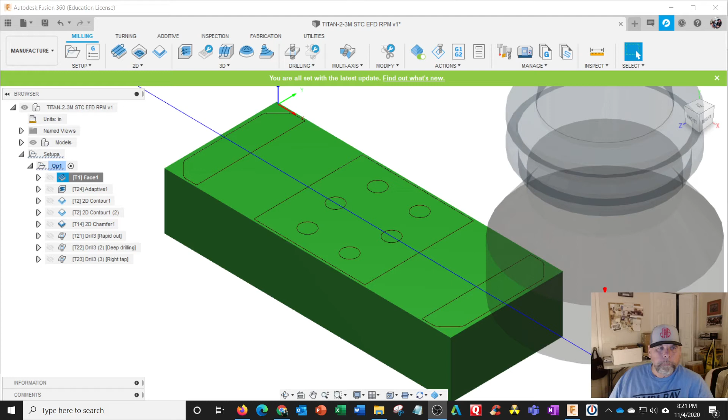We're going to improve our Titan 2-3M project by running better feeds and speeds. If you watch some of the videos I made on feeds and speeds, talking about chip load per tooth and how many RPM you're going to run.

So if you start watching many videos, Titan Lab videos with demonstrations, he puts right up there RPM, surface feet per minute, chip load. So all these are calculations. Initially he trains you with putting 4,000 on everything. But we can be more accurate than that and a little more machine specific.

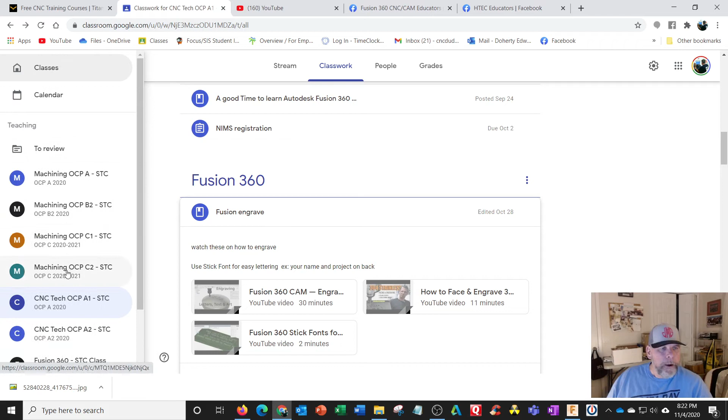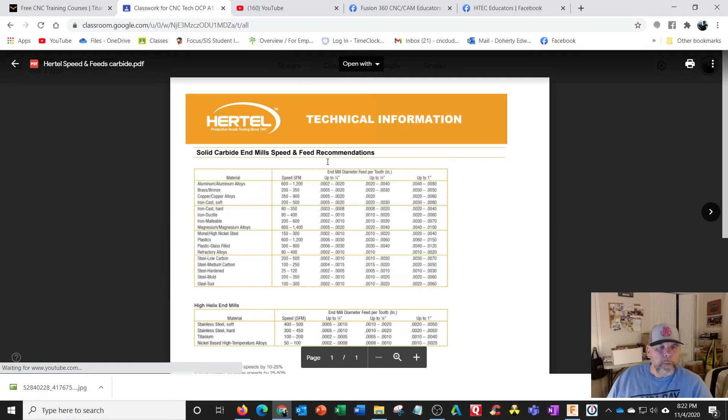Just for a quick review here. In classwork, we got the feed and speed lesson right here. And this would be a typical feed and speed chart. A lot of companies have these, so I probably should highlight this area right here.

We're pretty much cutting aluminum, and later on we're going to do some low carbon steel. So right here is surface feet per minute. Now if you watch the Haas Tips video on the tractor with the big tires and little tires, that's what we're all talking about here. This is not RPM, this is how you get RPM. The high and the low limit recommended, and it's a good starting point.

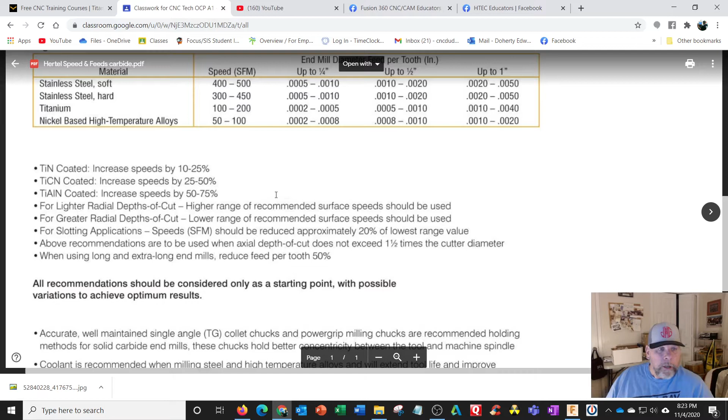There are other notes down here, like when using long or extra long end mills, reduce feed per tooth by 50%. If you're using coated ones, you can actually increase the speed, which is RPM. So there's some notes there. But generally speaking, for your normal milling operations, this is a good starting point. So you need to have RPM before you can start figuring out the feed rates.

In order to calculate surface feet per minute, it's a formula, but in Fusion it's built in. So let's try the half-inch end mill. That's this half-inch end mill. So right here it says feet per minute. Looking at the chart, 600 to 1200. I want to go as fast as I can, but not too fast.

Here's my Fusion again. Okay, 1200. That comes out to 9,167, and our fastest machine only goes 8,100, so it can't get there. Let me try 1,000. That's 7,639. It's capable of doing that.

It's actually a formula: surface feet per minute times the constant 3.82, divided by the diameter. So the small end mills will have to run faster than the big end mills to cover the same amount of ground if you were to lay it out flat. So actually you've got to turn the small tools faster, and face mills you've got to turn slower. So this is 706. We can attain that speed, and this is totally safe.

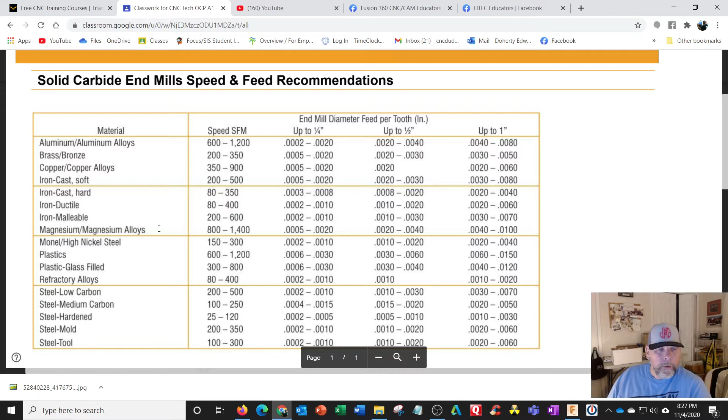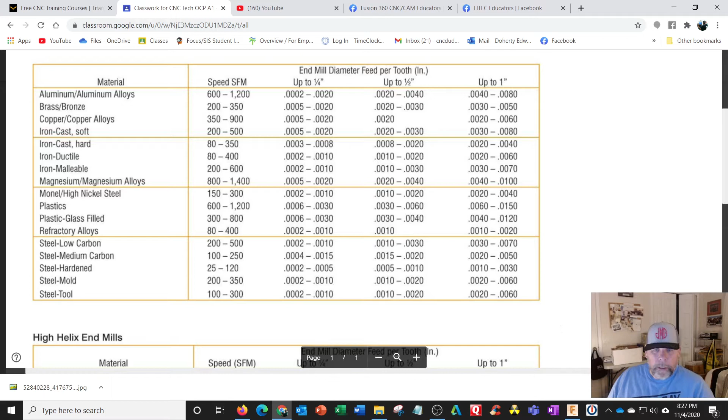We need to use some data. Now, if we're using low carbon steel, the surface feet per minute goes down, but the feed rate per tooth is really kind of the same, sort of. They're always in small numbers, thousandths. And if you have more teeth, that means you can cut more per revolution. So we can get into that. It's got math. But I made an updated tool list, and I'm going to update that right now.

I'm going to go edit these tools. All right, so it says select. I have the STC Titan building blocks right here. I'm going to go into here, and this is my current operation, but this is my STC Titan building block. And if I use the milling one, I can narrow it down to a smaller list. And these are sorted by size. So right there's 3-inch. And we have a 5.

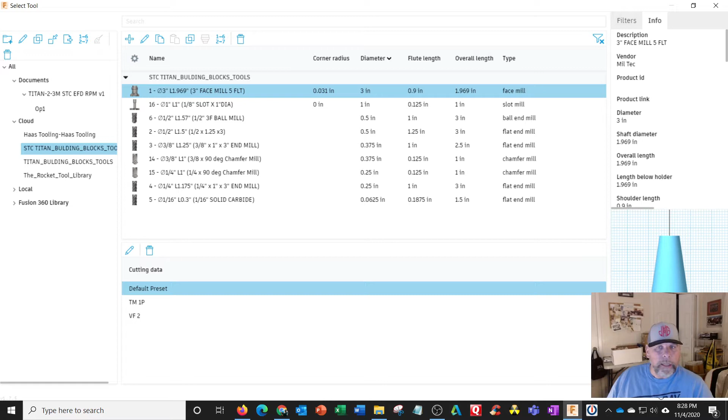What if we pick this one? It says right here, this is our two machines, TM1P. Press that, and these are all ready to go. 3,183. 35 inches a minute, that would work. If you're in the VF2, 3819, this would be fine. So I'm going to just plug these in for the VF2. All right.

Let's actually also, before I get too deep into it, look at machining time. Machining time here says 6 minutes and 36 seconds. I think I actually already improved this one once, but if I look at another one here, like this one, I put RPM on this one. And there's this one here, and I do machining time. Yeah, this is 8 minutes and 54 seconds. So that would be like 2 minutes faster.

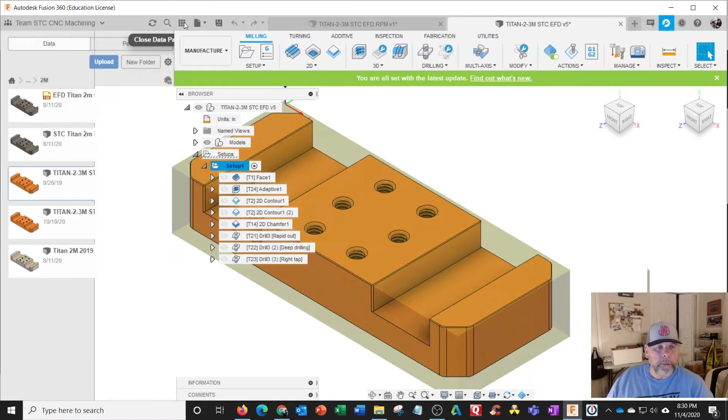Okay, let's go to adaptive, edit. I'm going to go into the new tool library. I'm going to go find my tool, milling, and that's the 1/2 inch one right here. Select. Default preset is already on 4,000. Or I'm going VF2, 7,500 RPM, 56 inches a minute. This should work just fine. Every time you change something, it says toolpath out of date, so we'll have to regenerate those.

Let's look at some other settings for improvement. Model top passes. Optimal load is 75 thousandths. That's the sideways cut. I would leave that alone. You might have to touch that one. And this one here, lift height, 0.01. And I'm going to change the non-engagement feed rate to 400 inches a minute. And then if I want these to always be there for adaptive, I can just go in here and say make default. So every time I bring this up, it'll already be there.

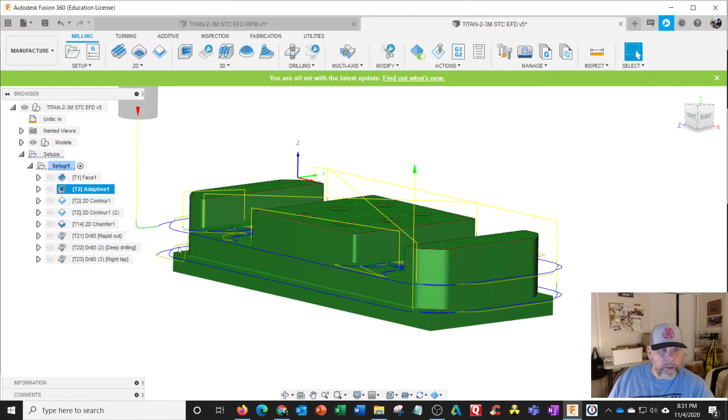And I'm going to leave this stay down level at 70%. Helix angle, this all looks good. Close this up and hit OK. It's recalculating. Okay, I noticed this one is cutting on 2 levels. So I had done some screenshots of settings, and I noticed that one of them was this number here, maximum roughing step down. We want to make this bigger than the tallest part of this thing, so we're just going to put in like 0.8.

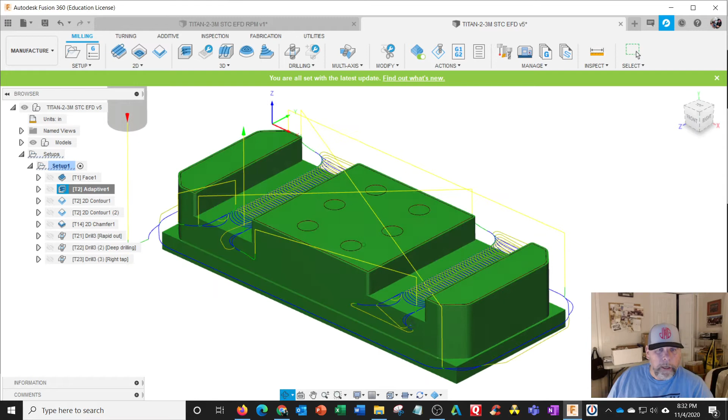All right, I'm going to hit OK. It recalculates. Now we only have one outside cut. It doesn't need to go around twice. This should work just fine. Let's go to 2D contour, which is the same tool, but we haven't set the preset. So we're going to save this. Oh, this one's not set. We got to go get the tool, that's why. Get the tool, but I'm using the same tool.

So I'm going to go into operation 1 right here. Why do I have 2 here? Yeah. I'm sorry, I got 2 tools on. That's why I'm getting messed up here. Cancel. Let me simplify this. I want to get rid of that. Ooh.

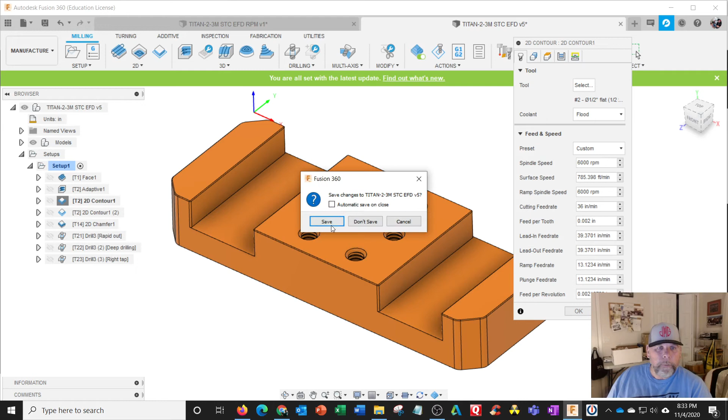Okay, go back to this one. Aha, I changed the wrong one. Do not leave it open. All right, we got the custom. Oh, there you go. So reselect this tool. Reselect this tool. Op 1. So I got to go in here and get the new tool.

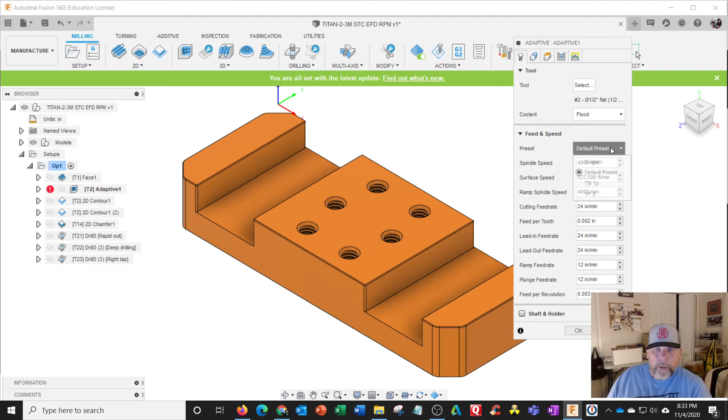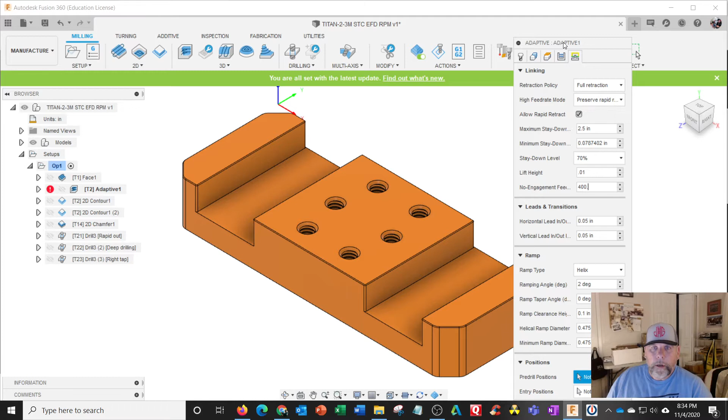1/2 inch end mill. Select and change this to VF2. And then go down and change this to roughing, max step 0.8 or 1 inch would work. And I'm going to change this to 70%. Lift height of 0.01, and I'm going to change this to 400 inches a minute. No-engagement feed rate. Hit OK.

Okay, recalculates, and this will do a full depth cut. All right, all the way around. Okay, let's go to the next tool. Edit. So we got to go select that tool, which is really in Op 1 already. So Op 1. Notice we have two tool 2s. We have duplication now. Which one is which? One of them has presets, one of them does not.

Let's select the bottom one. That one's got it. All right, VF2. Done, and this is contour milling, so we don't have to change any of these other numbers. Wear compensation. Okay, that one's done. And go up to here. Edit.

I got no custom settings. That means I got to go get the other tool in operation 1. Or I can just go right into the Titan, STC Titan. I think that will get me what I want. Notice down here it says cutting data, TM1 VF2. So if I was up here and pick this one, see this one only has nothing and this one's got both. Either one will work. I'm going to change this one to VF2. That one's done. That's contouring. That one's done.

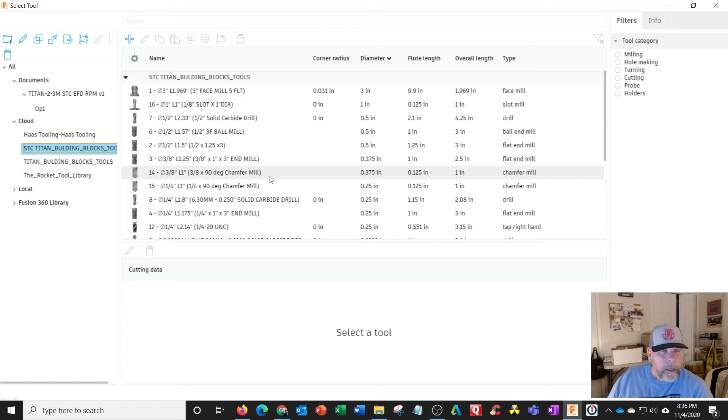We have chamfer mill. Edit. Select. Go into the STC library. That was the 3/8 chamfer mill. This one here. This has the presets. Okay, select. And I'll make this VF2. That's 8,000 RPM. That will work. Hit OK.

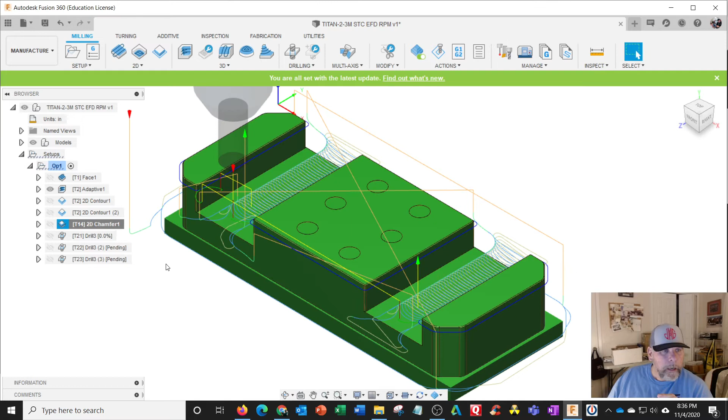And then we get drill, deep drilling tip. So this one uses the same chamfer tool. So I'm going to have to go get that. Select Op 1, and right here, 14. Select. I'm going to leave this at default setting at the lower RPM for the drilling, because this is doing two different things. So I don't think we can improve that at the moment. So we'll leave all those numbers the same. Okay.

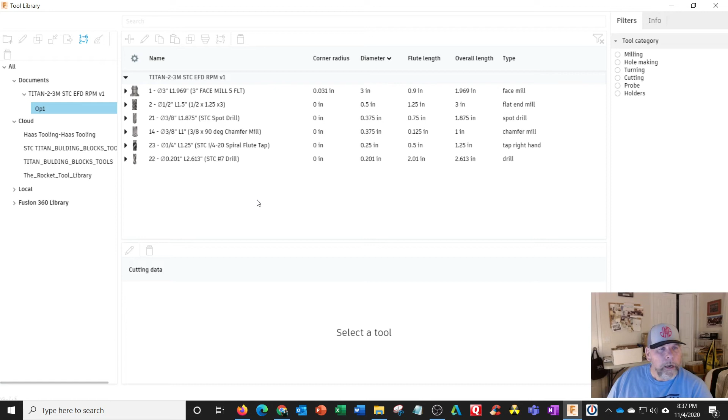All right, this one is the drill, and so these we can leave alone. Hit cancel. So now we have to renumber the tools because they're not in order. So I go to here, tool library, operation 1. 1, 2, 3, 4, 5, 6. I get 6 tools. Is that correct? Spot drill, chamfer mill. We have 2 of them.

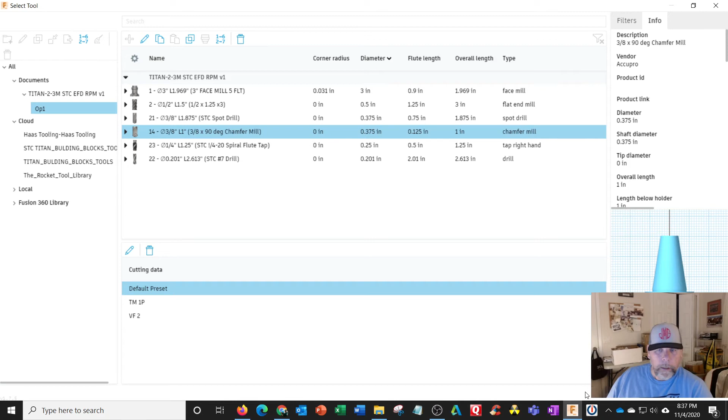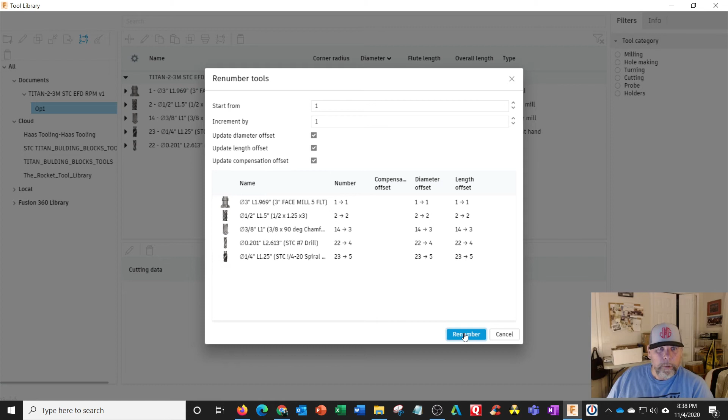Ah, I got the wrong selection here. I should only have, let's see, select tool, Op 1, 14, this one right here. Select. And leave it on default. Hit OK. Alright, I go to Tool Manager, Operation 1. I got 5 tools. I'm going to renumber them. It's going to be by order of operation. Renumber. The following are using feeds and speeds, but yes, they've been edited, correct.

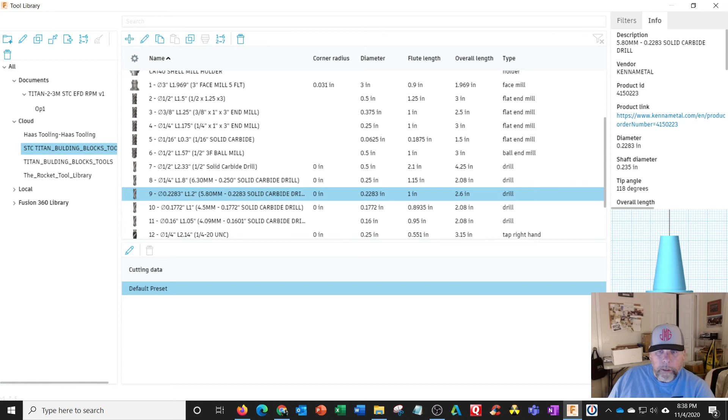Okay, I think one other thing we can check. Oh, wait a minute, this has got different tap, different feed. I don't know what I was doing there. STC, I gotta go get the proper drill, which would be 228 drill, close. That would be tool 4.

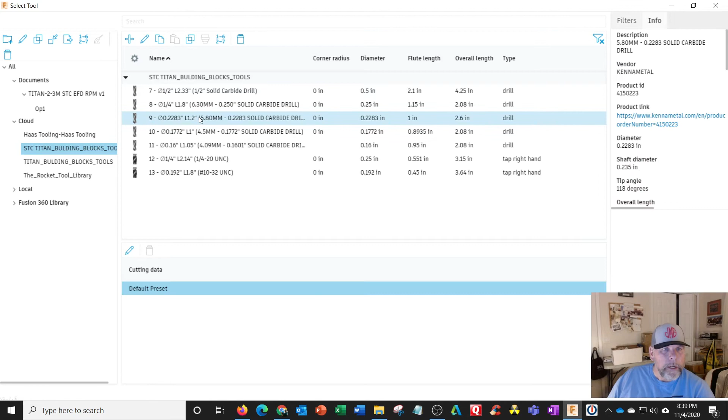Edit, select, Op 1. So I gotta go in here. And if I do hole making, it'll narrow my selection down to 228. Hit select. And we'll leave this alone. So another improvement in this one could be, right here it says pecking depth.

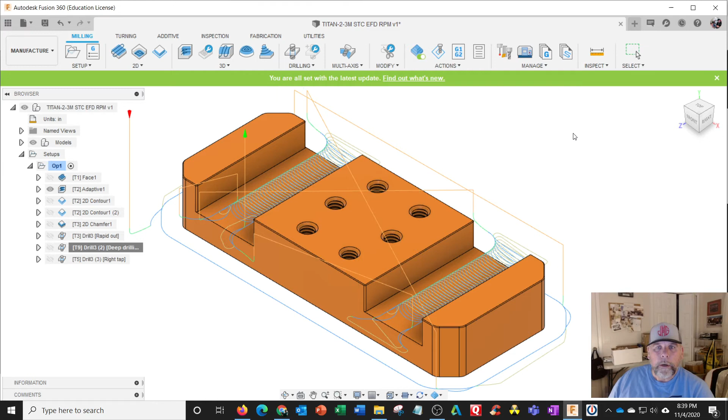So Mark Terryberry said we can do 1 to 2 times the diameter. So the diameter is 228. I'm going to make that 0.2. All right. And then the tap, let's go get the proper tap. Edit, select. I'm just going to go back in the library to make sure I have everything selected correctly. That's this one here, the 1/4 right hand tap. Select. Hit OK.

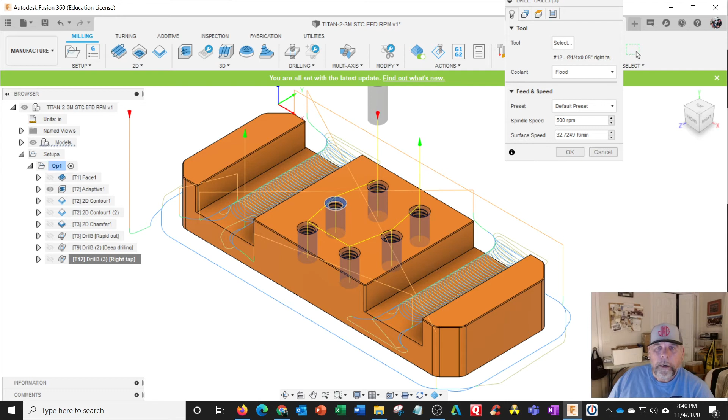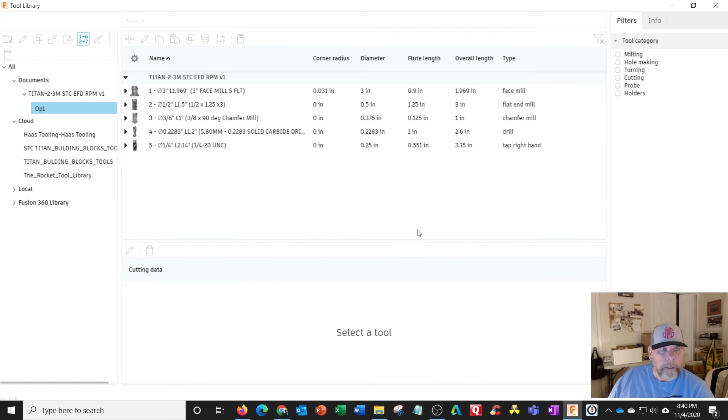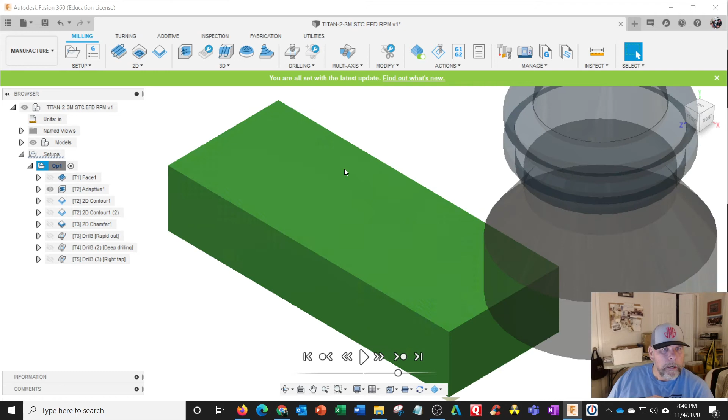Then go in the library. Now I have 1, 2, yeah, now I get them all selected correctly. I'm going to renumber these. Yes, hit yes there. Yes there. Okay. 1, 2, 3, 4, 5. That's correct now. Close. Let's do a quick time study. So this is now 5 minutes and 13 seconds versus 8 minutes. Close. Quick simulate. All right. Play. Now it's not going to run any faster in the simulation, but we'll make sure we selected everything correctly.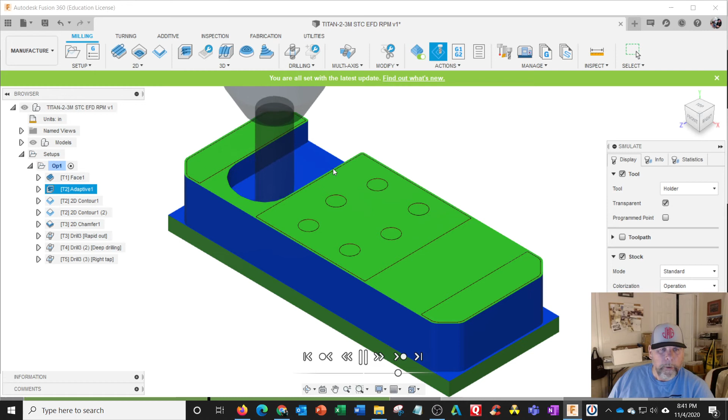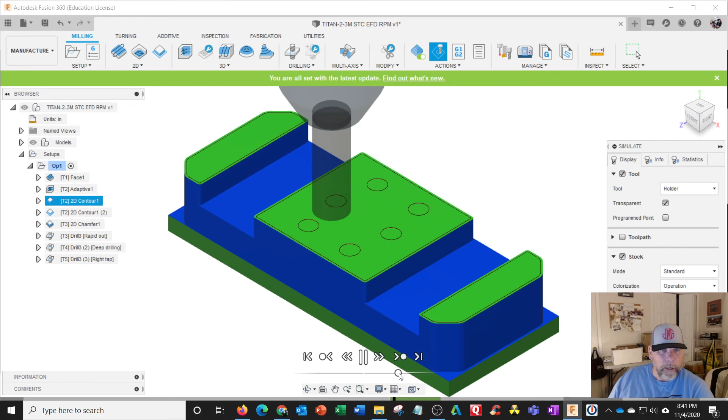So this is that trochoidal toolpath. This is the optimal load, how much it steps over. And you can see over here it's staying away from the boundaries. That's your stock to leave setting. And I have the operations set so it changes colors per operation. You might be using the same tool, but you can identify which one's doing what. All right, now I think it changes operations in a minute here. Yeah, it becomes another color. Okay, this is your finish cut. Okay.

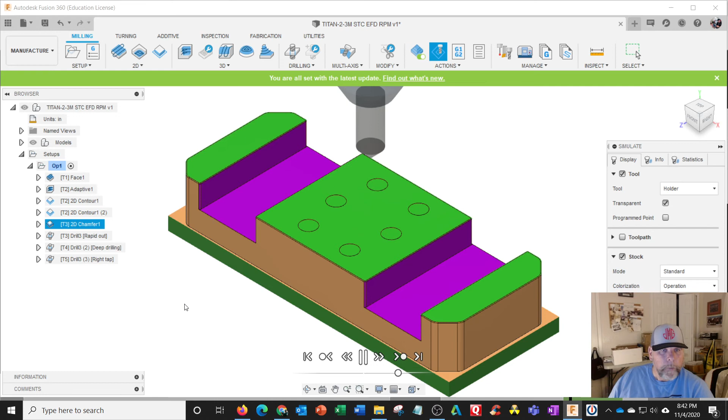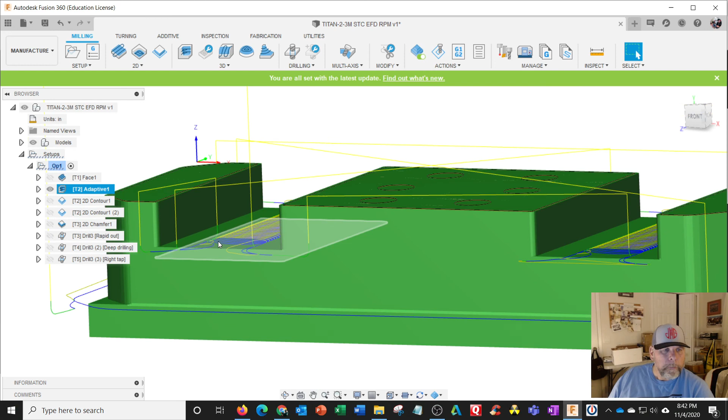Now we're going to, oop, that looks a little deep. Why is it so deep there? It would work. I think I must have a setting off. I think this should be closer. Chamfering looks fine. Done. Okay. Let me go revisit this one. I was looking at this. This looks like it's on the right level. Oh, you know what? Contours. Not that one, but this one. Notice this looks low. I think I picked the wrong number there. It's below that surface. I made a mistake.

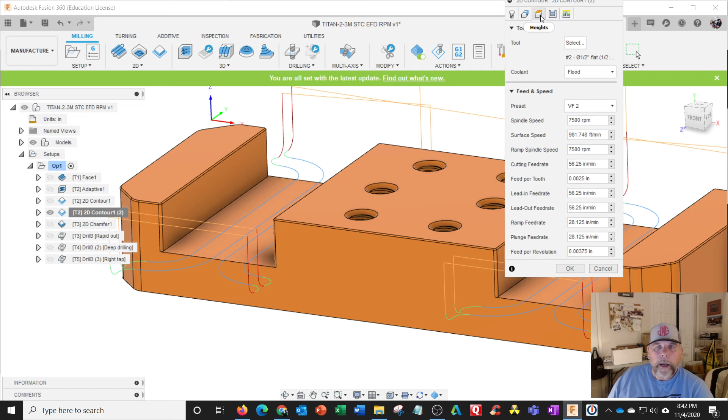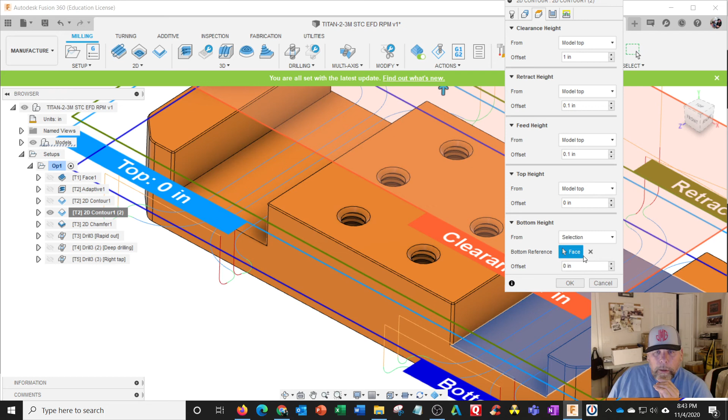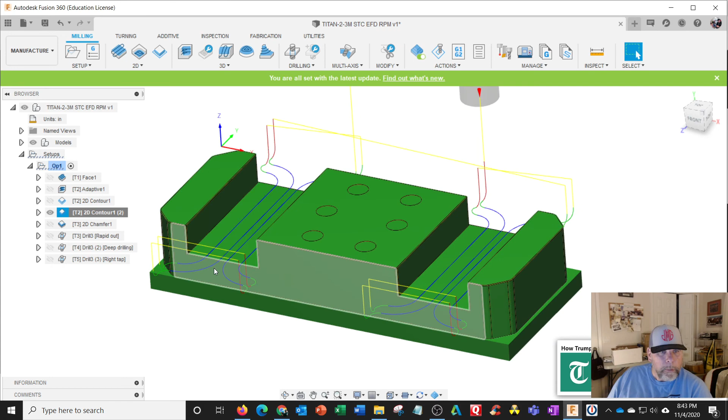Edit. Heights. Usually it has to do with the heights. This says selection. What did I select? I selected that surface. It says face. Let's see. This is nothing. This is that one, right? So this should say minus .400. Yeah, that looks right. Okay. Now that looks correct. See how these lines are up above? Oh, okay. Let's just do a quick simulate. I'm going to jump ahead by operation. Operation 1, operation 2. Oh, I'm sorry, 3, and now we'll hit play. No, it's still got those lines there.

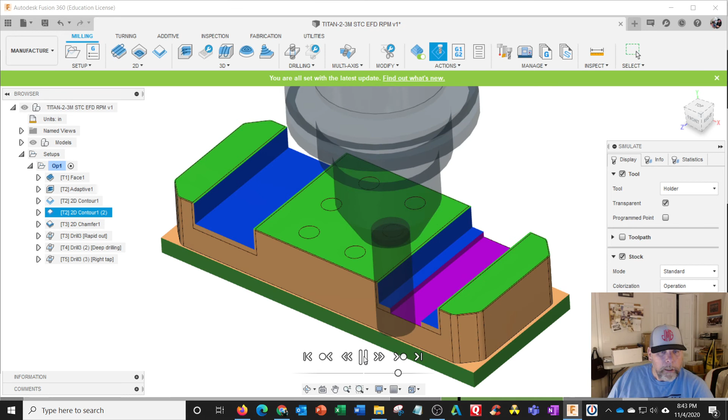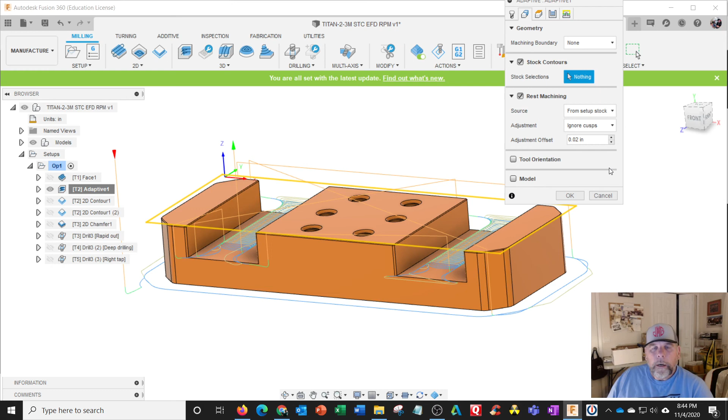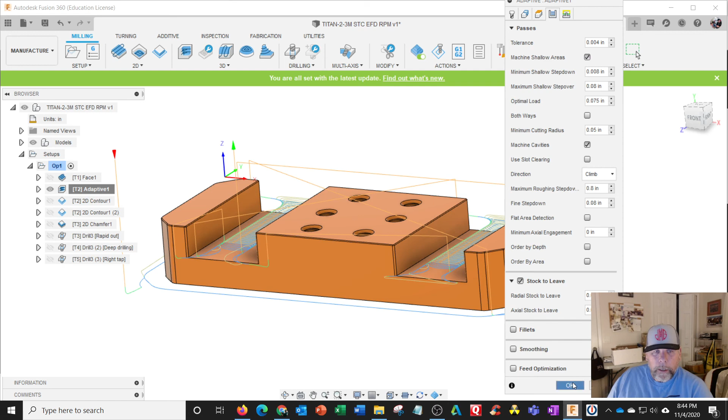All right, let's look at the adaptive settings. Now it looks high. Okay. What do we have here? Geometry. Rest machine. You have 15 minutes left of computer time. Heights. Well, yeah, that's okay. Stock to leave 20 and 20. Fine step down 80. Use slot clearing, machine cavities. Machine shallow areas. Maybe that's it. Hit OK. I think maybe that looks better.

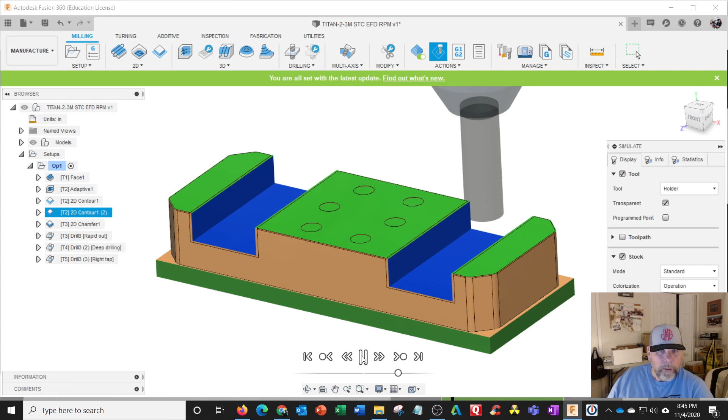So this is where I'm going to take some screenshots. Simulate. Jump ahead. Jump ahead. Jump ahead. Hit play. Yeah, that's it. You got to add machine shallow areas. It would have worked. Okay, let's check the time study. It's still the same time, 5 minutes and 13 seconds. Okay, this is ready to go.

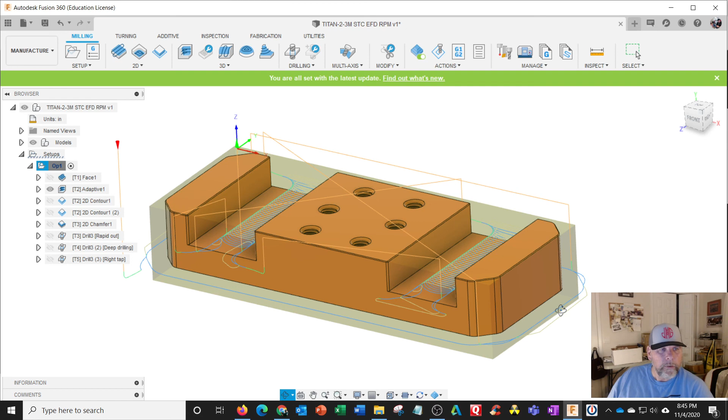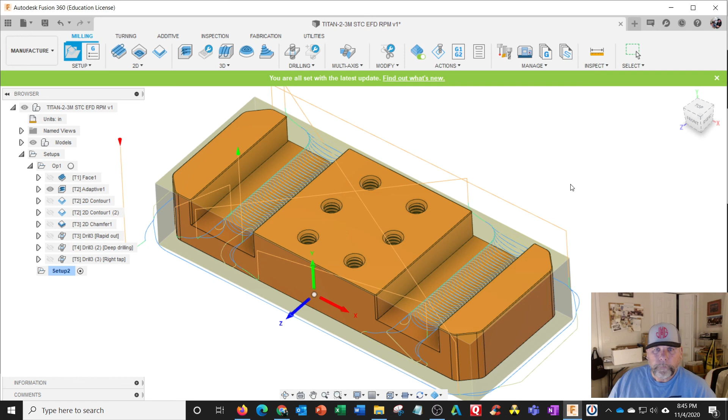Let me check my setups here. Stock up here. I need to make sure I fill this out. So 1001 is going to be our operation 1 standard number. This will be Titan 3M, Op 1, and EFD, my initials. Leave this on 0. Why did it do that? Oh, this is tilted, that's why. I must have imported this one. Alright, so that's all set to go.

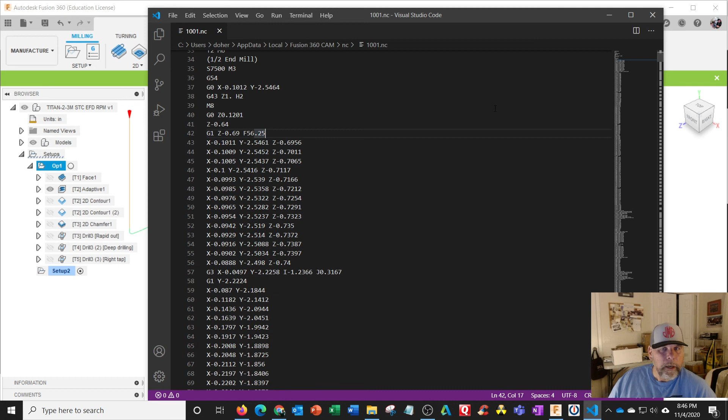Let's make some code. I have name here, program number's done, Haas mill done, post. Put it in the USB and double check the code, right? You have program number, program name, machine, timestamp, list of tools, 1, 2, 3, 4, 5, and we got 3820 for RPM. This one's 7500 with the better feed rates. The F is the feed rate right there. So this is ready to go. All right, and I'll follow up with the video on operation 2. This is our feed and speed update.